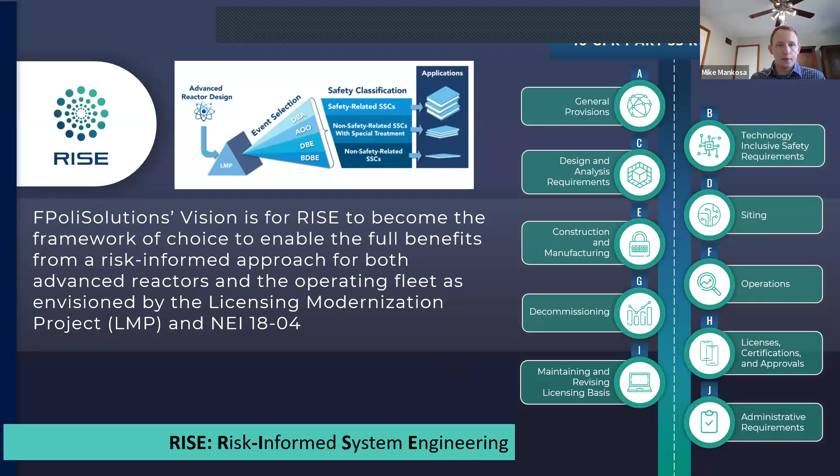So RISE, this risk-informed system engineering tool, was developed as we were reviewing the Licensing Modernization Project and NEI 18-04 a few years ago. The way we envisioned it was to be the framework for implementing the NEI 18-04 approach for generating a risk-informed safety case and going through that development process. So the purpose of RISE is really to be a collaboration and productivity tool and to help automate as much of this process as possible.

The tool is a web-based application that allows users to deploy it on their system and collaboratively work on developing this risk-informed safety case for either an advanced reactor or an existing LWR. So RISE is effectively a smart safety case builder for the design and licensing of nuclear reactors.

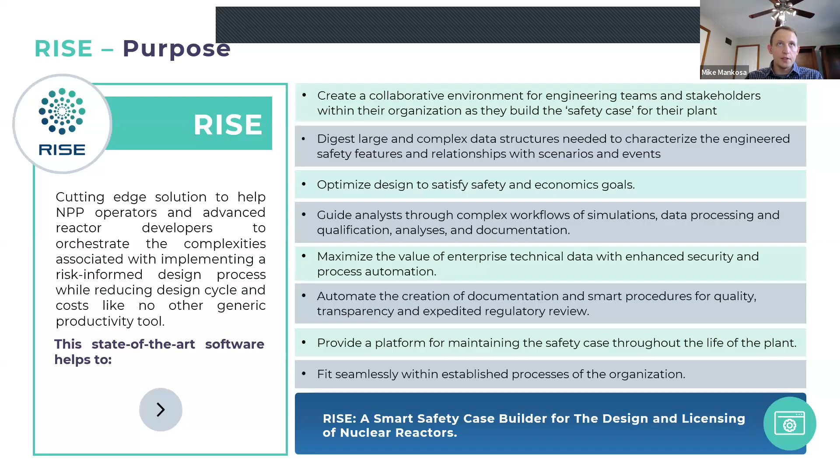So the current development status: we completed an SBIR phase 1, which is largely the content of this presentation, but we're showing the content more applied to an advanced reactor rather than an LWR, because the SBIR topic was specific to developing risk-informed methods for application to LWRs. So even though the tool was originally developed for advanced reactors, we've really expanded it to be able to develop a risk-informed safety case for any technology.

And in today's example, we'll be going through an entry we made for the modular high temperature gas reactor, the MHTGR design that was made by General Atomics back in the 80s.

So here's a high level code architecture layout of RISE. RISE is built within FPoli app, which is our baseline application, which hosts a database which connects all of our sub applications and also hosts the general username and login information and your access panel to these apps. And within that, we have RISE built.

And RISE is able to talk to the other applications within FPoli app, such as our simulation manager and data ontology tool, OGMA. So the idea is that you can set up your risk-informed safety case and any simulations, including uncertainty analysis and simulation case management, and everything's hosted on the same centralized database. So users can very easily develop their safety case with very rigorous detailing of the history of the data trail. So it's a very transparent method for making sure all of your information is archived correctly and that files aren't erroneously shifted about.

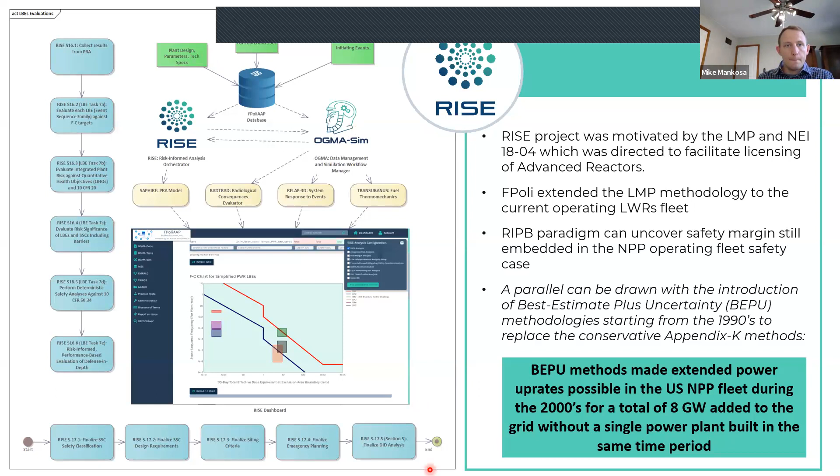So we're going to walk through an example plant entry. Again, we're going to be showing an example of the standard modular HTGR. So when using RISE, it's a table-based application like you see on the screen here. These are all screenshots of the app itself. And so we begin by generating a plant entry and putting in some metadata for that plant.

So you apply plant information, some more general information such as operating license, the start date of the reactor, the rated power, but you can also input information that can be iterated upon as part of the design, such as specific plant parameters like your power rating or flow rates or other parameters of your SSCs. And those parameters can be used downstream to alter your simulations as well.

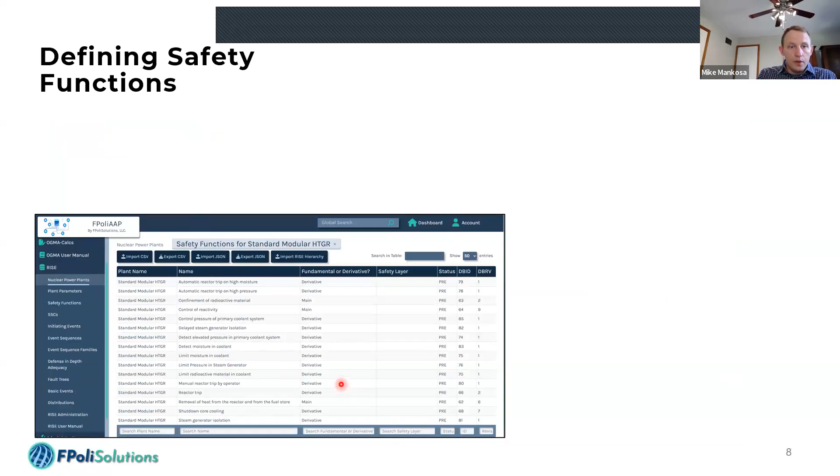Once you have your metadata entered, you can then go through and define your safety functions. So here's an example of the initial listing of the safety functions within the safety functions table. And when you open one of these items, you can then edit the metadata for that safety function. So the metadata includes information like associated events, whether this safety function is mitigating or preventative, and also associated SSCs that are linked to this safety function.

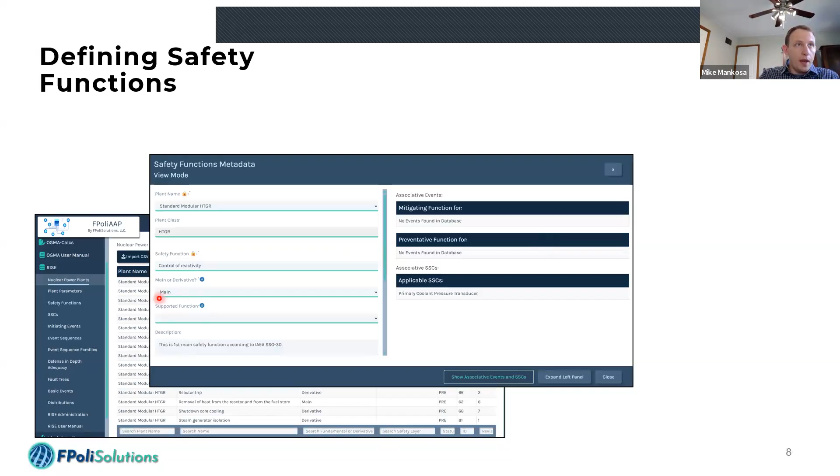You can also generate a hierarchy of your safety functions. So here you show it as a main or a derivative safety function. And ultimately, you can create a full hierarchy of safety functions, such as the one listed here. And then you can visualize it using the safety function visualization tool. And in this example, we have the three typical primary safety functions: control of reactivity, confinement of radioactive material, and also removal of heat from the reactor. And then from there, we branch down into sub-safety functions.

And this is fully customizable. The idea of the tool was, again, to be as technology inclusive as possible. So we make the framework for the engineer to expand as much as they want, or to keep things as brief as they would like for more simple analysis. So this is fully customizable. You can make your safety functions and their subsequent hierarchy as complex or simple as the user would desire.

And then we have a very similar setup for defining the SSCs. So you first enter all your SSCs on a table, and you can edit their metadata. And then you can view the hierarchy of SSCs. So in the same kind of concept, you have a high-level system, such as your steam generator, and then you have subsystems or components such as the generator tubes or steam generator isolation equipment.

And within the metadata, you can set preliminary safety denotations for them, such as saying safety related or not. And then downstream of this, the idea is to actually test those assumptions and determine, based on the analysis following NEI 18-04, whether these would be safety related SSCs or not.

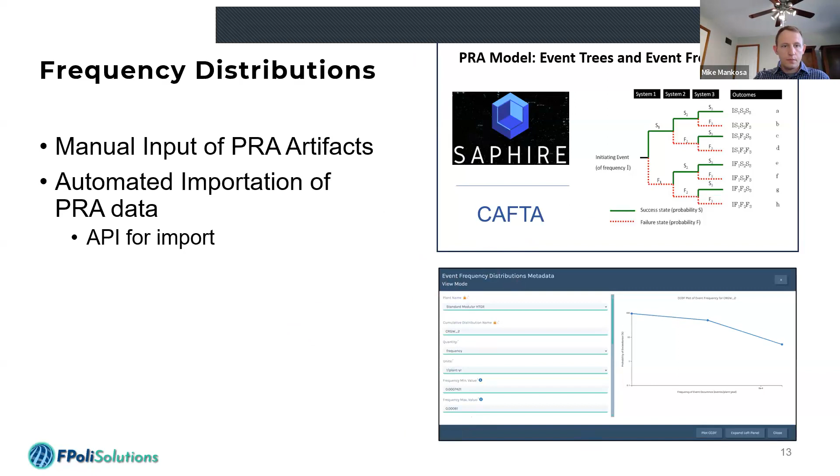And the consequence distribution is very similar, also a CCDF. And the distribution doesn't need to be as simplistic as a mean, 5th and 95th. That's just a minimum requirement. You can have your distribution be more detailed if you need.

And under this current SBIR, we are working on developing the calculation of these dose values to work with your risk-informed simulation. So effectively, as you build your event sequences, you can then build the simulation of those event sequences using severe accident progression and radiological consequence and dose assessment tools.

So we're currently looking at 3 different methods for doing this. One, we're going to be using a combination of RELAP5-3D and RADTRAD. Then we're also going to use MELCOR and MACCS together. And then we can also use custom Python scripts if you have a more simplistic model that doesn't require as detailed of a severe accident progression.

But the idea is that we're developing the framework for the user to use whichever tools they're already planning on using for the severe accident progression and radiological consequence. We don't want to limit the user to a specific route.

And like we saw with the event sequence family example, once you have this PRA information, it obviously goes on your frequency y-axis, and your severe accident progression and dose consequence assessment goes on your x-axis. And within RISE, you can set the specific metric to be whatever you'd like.

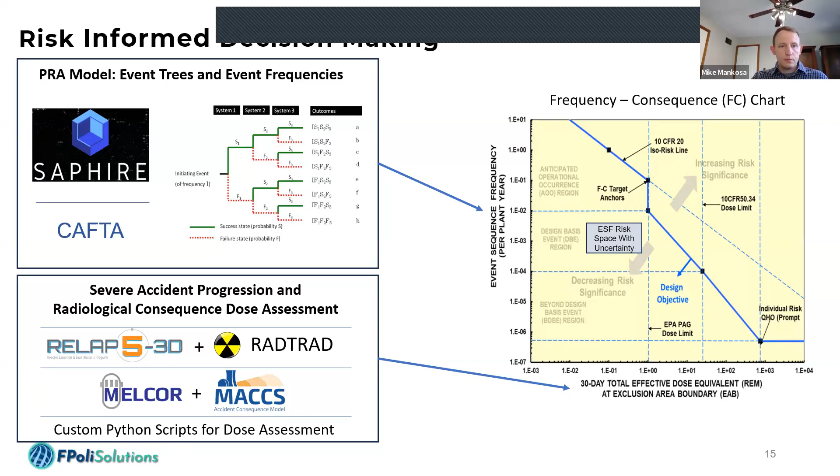And so once all that information is imported into RISE and you have all your metadata set and you have your PRA information set, and once all of your dose consequence analyses are performed, or at least input to your distributions, you can then run the RISE analysis dashboard, which goes through the NEI 18-04 sort of suggested analyses and calculates them for the user.

So the first thing that's done is a very simple LBE classification. So in this example with the MHTGR, we started with 157 event sequences. Those were grouped into 82 event sequence families. And from there, we ended up with 60 LBEs, and those remaining 22, I believe, just fell out below the residual cutoff.

With the remaining 60 LBEs, they're classified into AOO, DBE, or BDBE, just purely based on their frequency of occurrence. And in some instances, given we're looking at the mean value of frequency plus the uncertainty, it's possible to span the border between a DBE and BDBE. So you can see that in this particular example, both are set to true.

And then RISE will generate this F-C chart on the dashboard. And this is sort of an expanded version of what we saw for the single event sequence family, but now we're showing all event sequence families. And again, these items are customizable, and on the RISE dashboard itself, it's interactive. You can actually click on your corners here and see the particular values and the actual metadata of that particular data point.

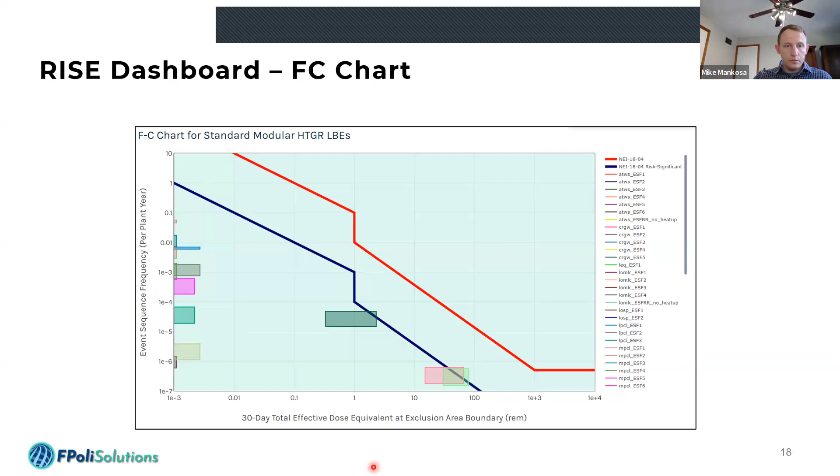The next part is the integrated risk metrics. So RISE will go through and calculate the integrated risk metrics by summing up the LBEs, the appropriate LBEs, and it will generate this summary table, and will show you whether or not it's acceptable based on whichever regulatory guidance you're following and the cutoff values that you enter for that guidance.

And then RISE will go through and do some risk margin quantification, where we're looking at the mean frequency and the margin there, and the mean consequence and the margin there, and then the same thing for frequency and consequence in the 95th percentile and its margin. And we'll automatically generate some risk significance output based on the available margin or lack thereof.

And next up, RISE does the safety function classification. And this is intended to be as automated as possible. So we will give a summary of the preventative safety functions and the mitigating safety functions, as well as we'll perform safety function studies to determine which safety functions would be considered required.

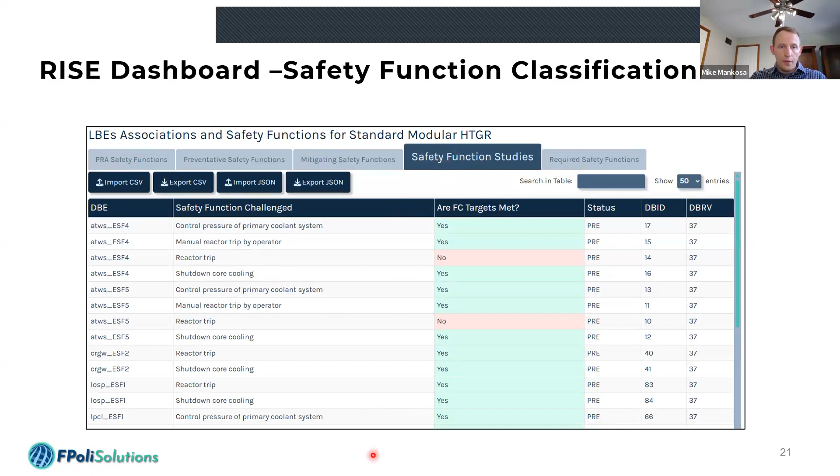And a lot of this particular automation is still under development, but we do have the automated safety function studies working currently. And the way that works is we look at a particular event sequence. So this has actually been done on an LBE basis, which is based on the event sequence families. So the event sequence family would look at whatever you select to be your limiting event sequence, and would then analyze that particular event sequence.

So for this example, we're looking back at the control rod group withdrawal for the MHTGR and the second event sequence there. And the safety function being challenged is the reactor trip. So what the tool does is it takes the probability of failure, sets it to 1.0, and recalculates the frequency of this event occurring, and uses that as a new data point on the frequency axis.

And then to determine what an equivalent dose consequence would be, it finds the sort of nearest neighbor approach for a similar event sequence that an existing dose consequence distribution exists for, and it uses that as a new dose consequence distribution.

And then it will plot the new data point based on the elimination, or the challenge rather, of that safety function. And depending on where that data point lies, and this is for the mean only in this instance, it can be deemed to be a required safety function or not.

And so again, for this example, we're looking at this control rod group withdrawal, and this is the initial risk envelope, and it just had a small amount of uncertainty on the y-axis, which is why it looks like a flat line, but it's still a box. Just zoomed out a little bit. And this is our new location based on the elimination or challenge of the safety function for the mean value.

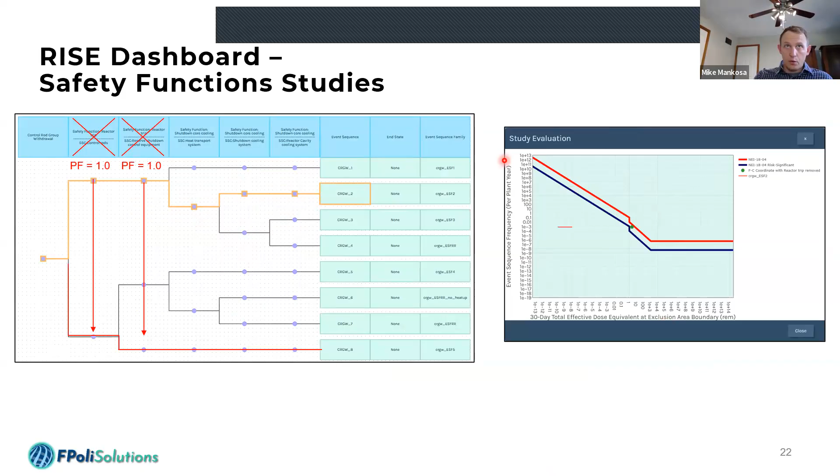And then for the SSC classification, we're working on a similar approach where we effectively remove certain SSCs and then recalculate what your frequency and consequence would be based on the removal of that. And in this instance, it's a little bit more complicated than just looking at the event tree. So what we're considering doing here is considering that if you would want to challenge a specific SSC, the idea would be that this SSC is related to a specific basic event in your fault tree.

And to eliminate that basic event, you could set that probability of failure equal to 1 again, but then you would have to recalculate your fault tree, which would require going through the full cut set analysis and fault tree analysis. So we're looking at updating our APIs to automatically run either CAFTA or SAPHIRE to recalculate your fault tree and then recalculate your event sequences, and then pull that information back in to perform this particular SSC classification study.

But for the time being, it's just showing a high-level summary of all the information for the SSC itself. And so RISE opportunities, we see opportunities obviously in advanced reactor licensing. This is where we're aiming for. You can use it for generation of the RIPB safety case, providing transparency, scrutability, and collaboration, providing risk insights.

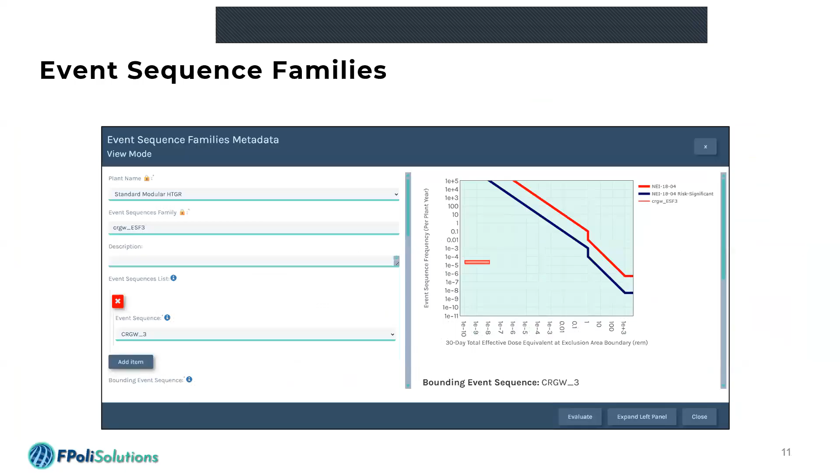I did have one question in general based on the shift that you've been talking about for the current SBIR. You mentioned that the application was originally designed specifically for non-light water reactors, but now that you've been focused on use with light water reactor designs, I'm curious if you found any major differences or pinch points related to the methodology or the use of this specific tool between the different groups of designs.

I mean, the biggest holdup that we've seen is just the acceptance of risk-informed methods in the LWR community, and obviously there are some there, like the 10 CFR 50.69 type approach, but with the prompt for the SBIR, it was really just to try and introduce the topic and get some momentum behind it. So our approach is to show the margin delta between the traditional deterministic, like Chapter 15 approach, and actually going through a full risk-informed analysis for a select couple of entries, and to show the margin that could be quantified following the NEI 18-04 approach specifically.

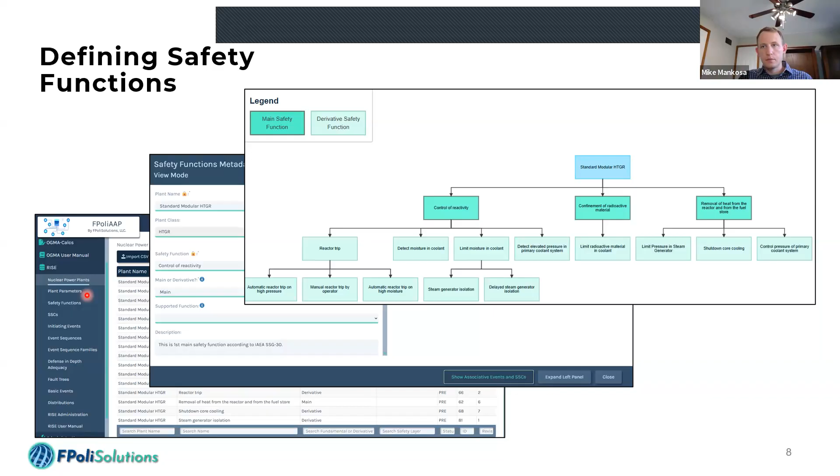Mike, you use the term safety case, and if I understood you right, this tool can be used to automate development of a safety case. Did I understand you correctly? Yes. So if you wanted to do that, how do you define a safety case? So in this context, we're defining the safety case as really the NEI 18-04 approach. So your risk profile based on your dose consequence simulations and PRA frequency. Okay, thank you.